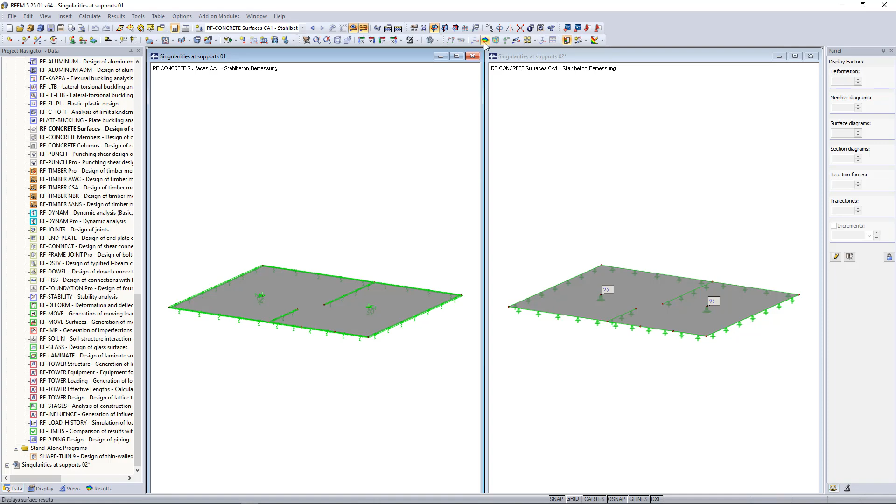We can see here two concrete slabs, and if we display the results, we can clearly see that the required reinforcement, especially at the nodal support, is too high compared to the other model. And the reason for this is we have here a typical singularity caused by, we can say, unrealistic support conditions, meaning the support here is too rigid, resulting in a stress concentration at this point. And in reality, this does not occur in that amount.

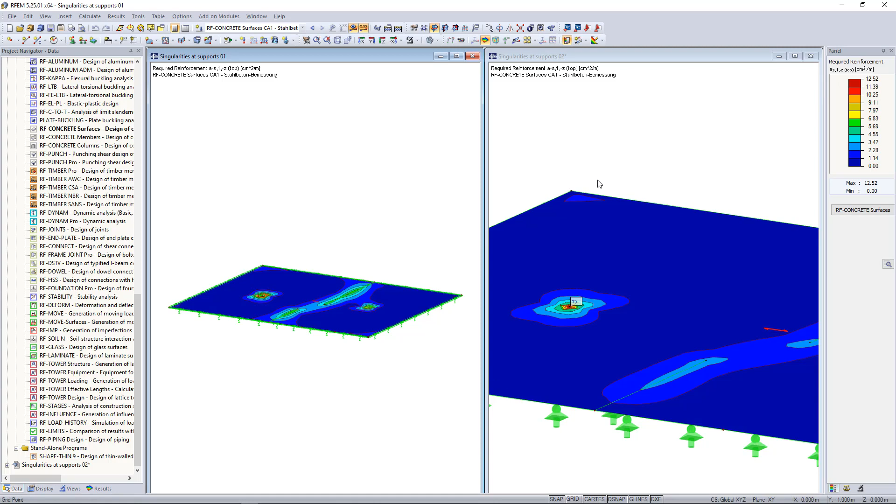So how can we avoid those singularity effects? As a tip, when creating such structures, we can define elastic supports instead of fully rigid ones. And for nodal supports, we can use the option called column in Z, meaning in Z direction. We can enter the dialog for that by double-clicking on the support, and here we can find this option. So if you select this checkbox, a new dialog will show up.

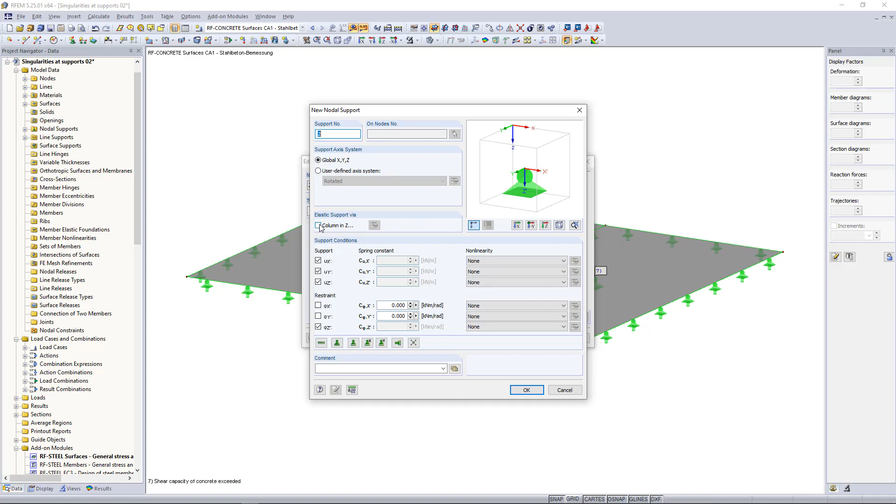And then for defining this kind of supports, there are basically three options. The first one is called elastic surface foundation. The second option is an elastic nodal support. And there is a third one, which is a nodal support with an adapted FE mesh. So what's the difference between these options, or what does the program internally do?

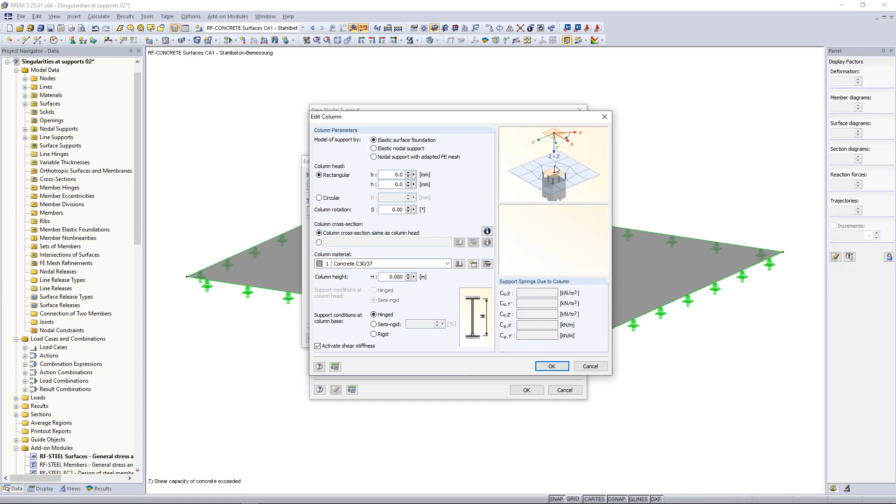If we choose surface foundation, the surface of the column with the defined dimensions is cut out. And then we basically have here an elastic surface support, and the spring values are calculated automatically by the program. If we choose elastic nodal support, the surface of the column is cut out as well, but supported at one node. So here the support is modeled as a nodal support, as the name suggests, but with translational and rotational springs, which are again calculated automatically by the program. In addition, to consider the higher bending rigidity, the surface thickness is doubled by the program internally.

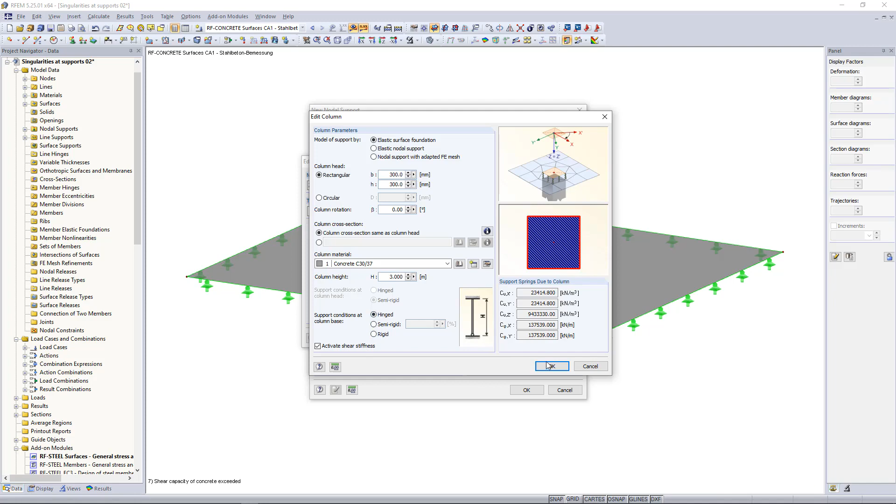For our example, let's say we choose the first option, and then down below we can enter the dimensions for the column, for instance 300 by 300 millimeters. Next we can select the material and define the height, which will be, let's say, 3 meters. Additionally, we have here the option to select the support conditions, whether it's a hinged one, a semi-rigid or a rigid one. Next, we can click OK through all of these dialogs.

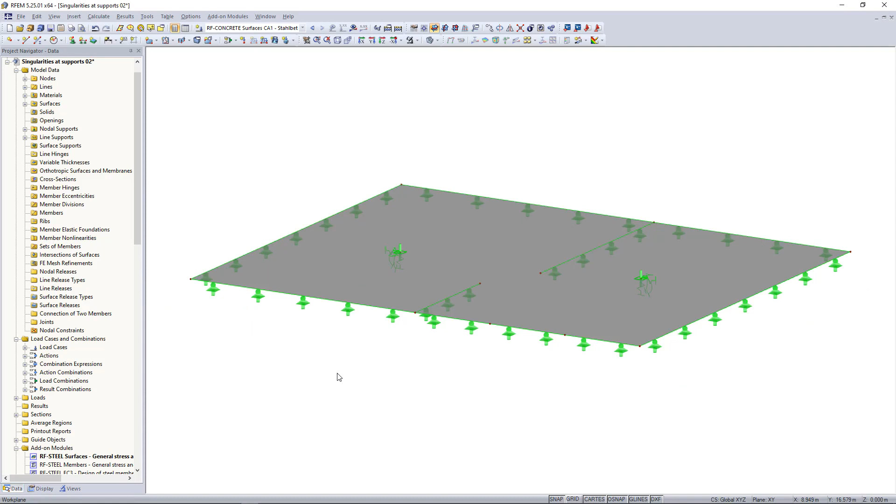Now we can see in the model our defined support. We will change the second support as well by double-clicking on the support and then simply choosing the support type that we've just created. We can display, if we want to, the dimensions of the column. We can do that in the display menu. If we expand nodal support, here we can find column. And now we can see the column in our model.

So for line supports, in case we have a wall under a slab, or if we create, for example, not a 3D but a 2D model, where walls under a slab are commonly modeled as line supports, again this also causes singularities due to too rigid support conditions. And for that we can also use elastic supports. All we have to do is double-click on the line support and then, instead of column in Z, we can find here wall in Z.

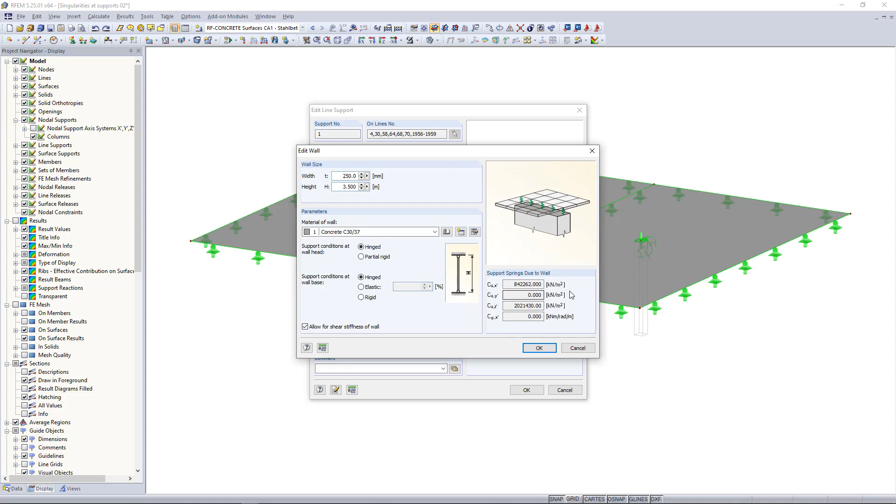Similar to the nodal support, we can enter the dimensions, for example 250 millimeters and 3.5 for the height. Next, we can select material and support conditions. On the right side here, we can then see the calculated values for the spring constants and then click OK. We can also get the dimensions of the walls displayed under line support and then choosing walls. And after that, we can calculate the structure once again.